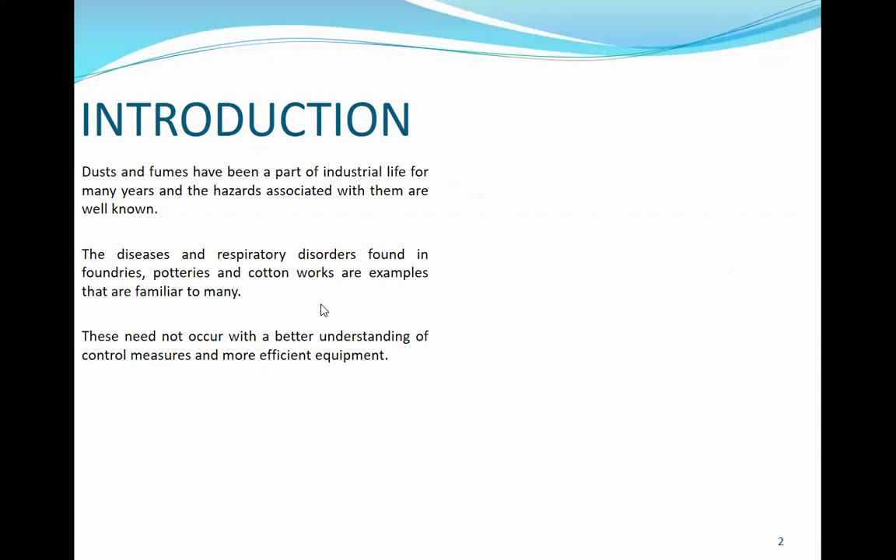Introduction. Dust and fumes have been a part of industrial life for many years, and the hazards associated with them are well known. The disease and respiratory disorders found in foundries, potteries, and cotton works are examples familiar to many. This need not occur with a better understanding of control measures and more efficient equipment. So the DNR requires air pollution control equipment.

So what is the nature of dust and fumes? Dust can be said to be a solid broken down into powder, and the form it takes will have different effects on the body. Fibrous dust can attack tissue directly, while others may be composed of poisons which are absorbed into the bloodstream. Fumes can be regarded as very small particles resulting from chemical reaction or condensation of vapors, which can have the same two effects. The standard unit normally used for measuring dust particles is the micron.

One thousandth of a millimeter, the micron. So the smallest particle visible to the unaided eye is between 50 to 100 microns, and the most dangerous sizes are between 0.2 and 5 microns. Particles larger than this are usually unable to penetrate the lung defenses, and the smaller ones settle out too slowly.

Some dust can be both toxic and fibrous, like asbestos, and are therefore harmful even outside this parameter. So it may be assumed that dust which is visible, between 50 and 100 microns, is quite safe. However, this is not the case, as a dust cloud never consists solely of particles of one size mix. Analysis would show percentages of all sizes, and for this reason special care is needed in measuring dust cloud and concentration. The next most important factor to consider when assessing a dust cloud is the actual amount of dust present.

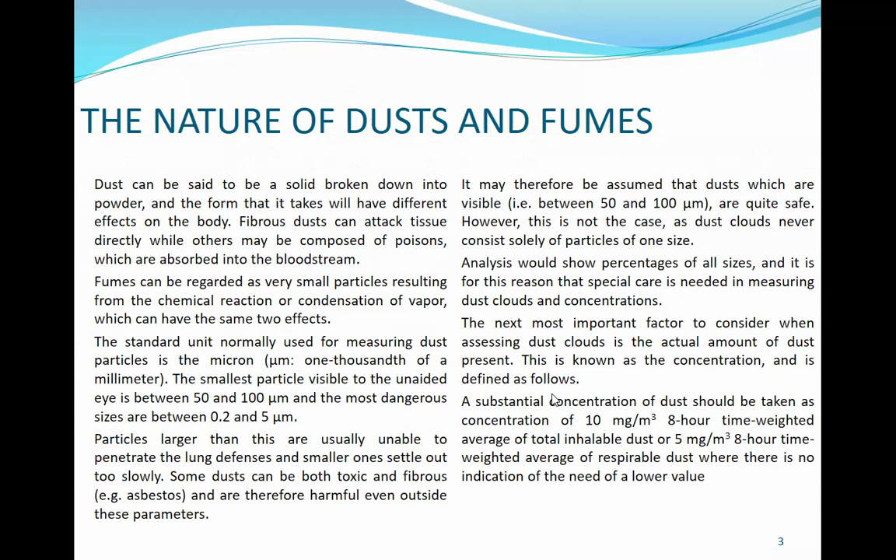Control of dust and fumes. The purpose of the control plant is to maintain a working environment that is acceptable in terms of any statutory regulations and the custom and practice within the industry. The effectiveness of a control system is measured by the amount of dust or fumes it controls. Efficiency, on the other hand, is measured by the amount of power it takes to do the work.

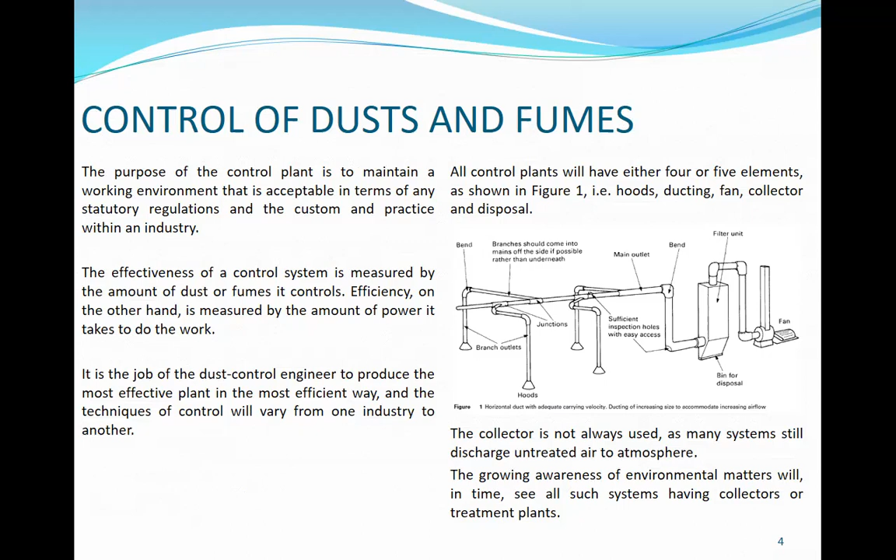Hoods that totally enclose the process provide maximum effectiveness, however, prevent the operator from carrying out the process for which the control was needed in the first place.

There are 4 rules for the design of effective hoods, irrespective of the process. Rule 1: the hood should be as close to the source of generation as possible. It should be close so that if dust is generated, it gets drawn in, not floating far away.

Rule 2: the location and shape of the hood is such that the contaminant is thrown into the hood, for capturing. Rule 3: the air flowing past the source and into the hood has a velocity at the origin greater than the velocity of escape of the contaminant, so that it can be captured faster.

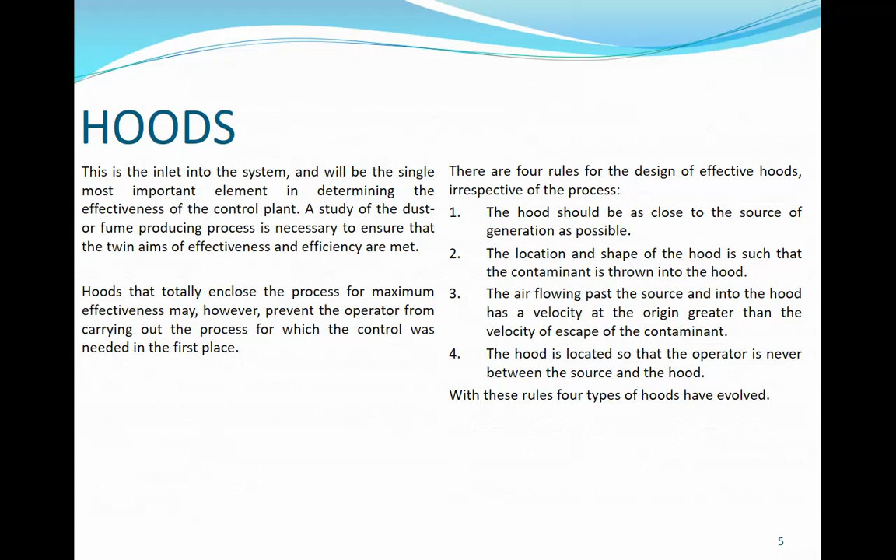Also suction. Rule 4: the hood is located so that the operator is never between the source and the hood. So with these rules, 4 types of hood have evolved: the total enclosure.

This ensures that the process is totally enclosed, which prevents any leakage to the workplace. It is rarely used except for dangerous materials such as radioactive particles in the nuclear industry or biological particles in the drug industry. This technique is used on bucket elevators, conveyors, and holding bins.

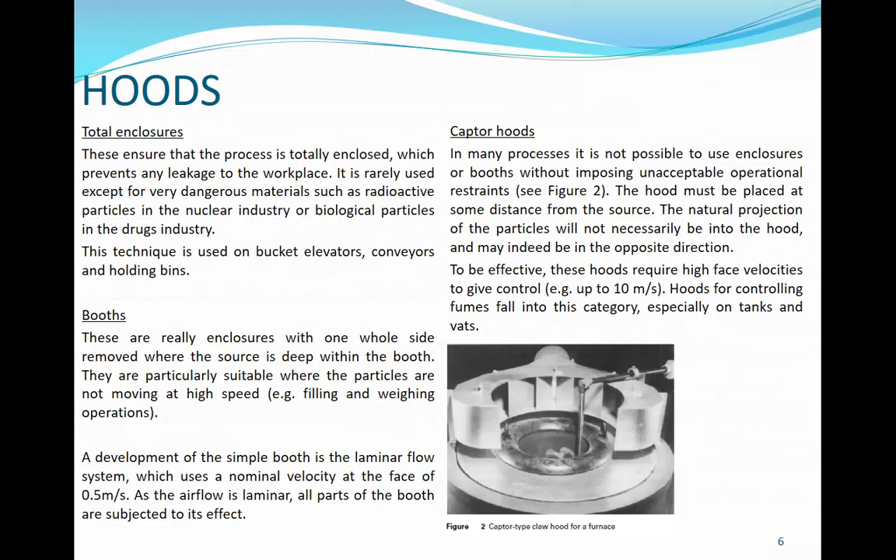Receptor hoods, these are the ones you commonly see. These derive their name from the method of entrainment.

The hood is placed in the path of the particle and uses the momentum of the particle to assist in control. It is important to have a clear understanding of the process, the direction particles take, and the movement of air created by the process.

Grinding wheels release dust over the top of the wheel, and considerable air movement is generated by the process. Therefore, these are ideally suited to control by receptor hood, figure 3.

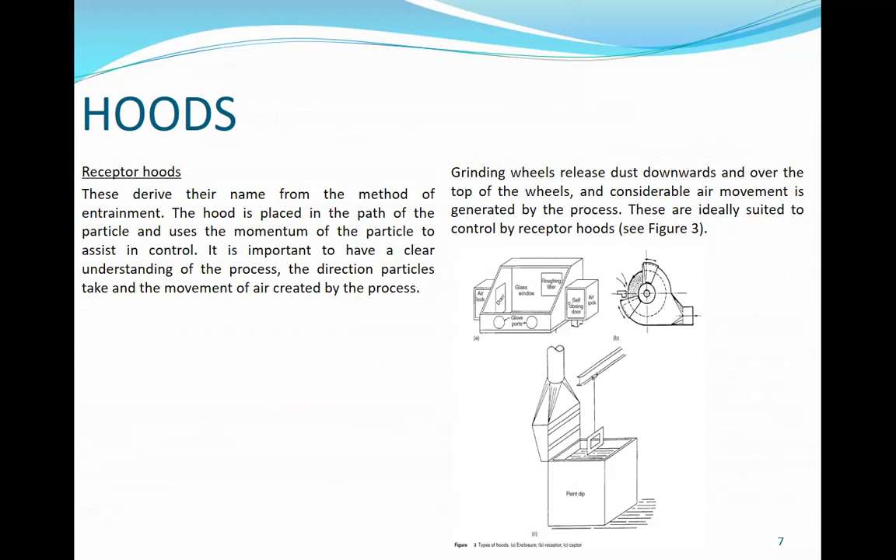So, ducting. What is ducting? The gauge of the duct, or the thickness, should be taken into account based on the nature of the particles and the operating pressure of the system.

Number 2, the method of construction usually encountered: lock-formed, welded, and slip joint and flanges. You'll encounter this in air conditioning, conditioning, and ducting.

Number 3, the construction material should be selected to withstand the operating conditions and any conditions of the pollutant. Galvanized sheet, steel, and black mild steel are the most common for general work. Corrosion or heat application will have ducting constructed in stainless steel or plastic.

For standard gauges in millimeters for this work, here they are: general dust work, 0 to 450 mm width, with a thickness of 1.0 mm. This is for general duty work.

So, all ducts over 450 mm should be flanged. This means all ducts at 450 mm should be flanged. This is also for foundry work.

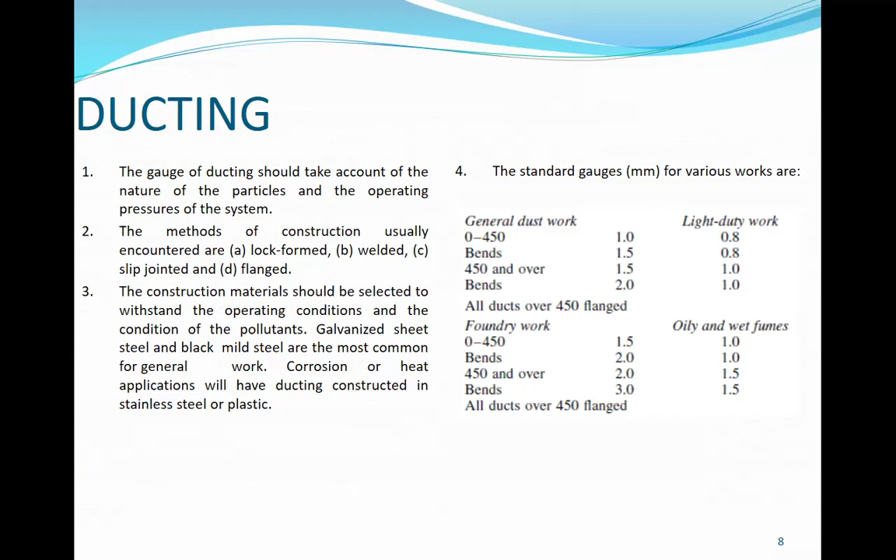And then for other work, here it is. Foundry work, oily and wet fumes, that's the data for it.

Number 5, the design of ductwork must ensure that the plant is both effective and efficient. Sharp bends and abrupt entries of branches into the main cause unnecessary pressure loss. Incorrectly sized ducts result in high pressure losses or blockages due to fallout from velocities being too low.

Number 6, the ducting should be adequately supported and fitted with inspection doors or ports. Number 7, a determination point in any system is the discharge, and many designs are used.

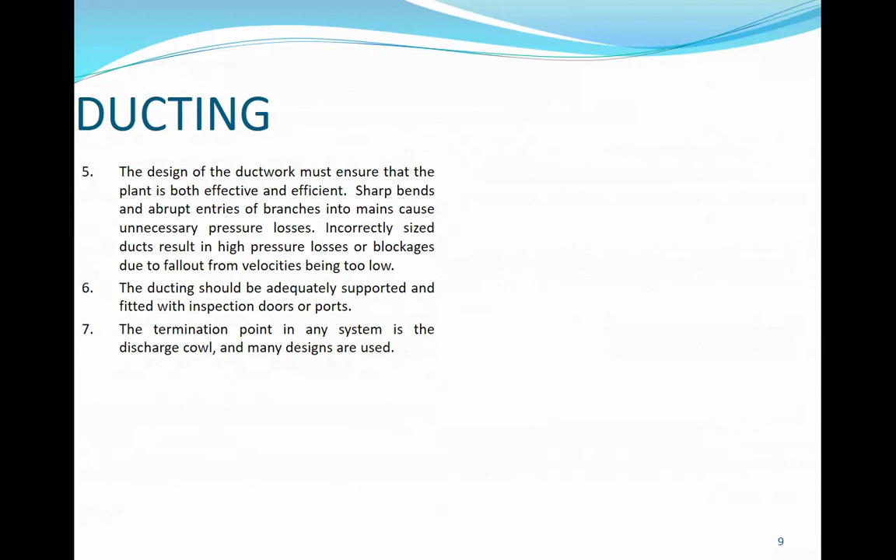Fans and louvres. Fan is a basic term.

So, in selecting fans, wait now. Fan engineering...

Fan engineering is a basic technology with its origin in ancient times. Fans have existed for a long time. It was developed from the wheel and pump as the need grew for continuous quantities of moving air at low pressure. Without the fan, a system will not function, and it is therefore necessary to select the fan to ensure both effective and efficient running of the plant.

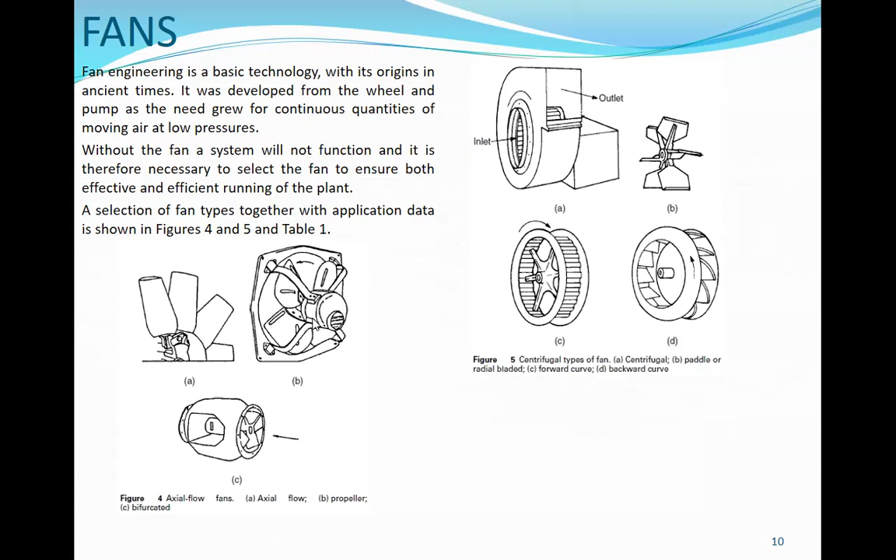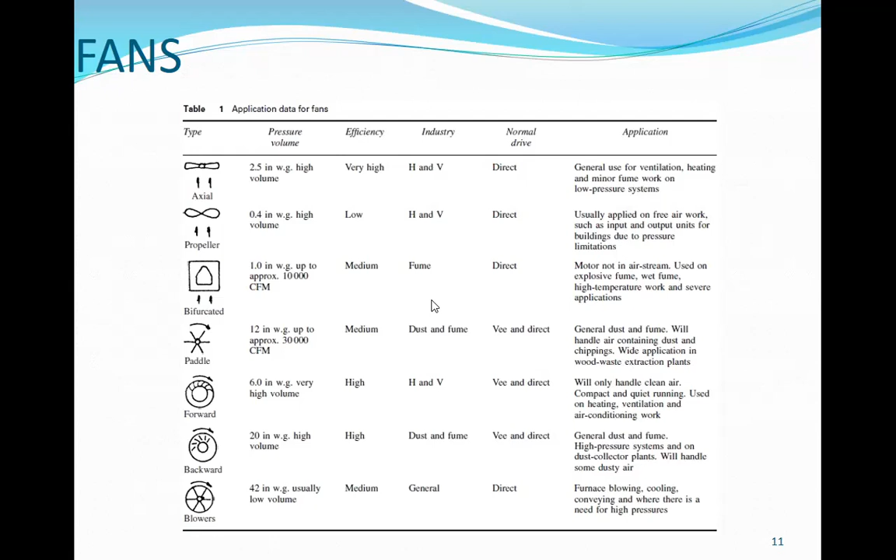So, fan performance and loads. In selecting a fan for a system, the two most important characteristics to consider are the volume and pressure. This can be said to be the movement of air in cubic meter per hour against the system resistance, which is the millimeter of water. And there are other units for this.

As the majority of systems operate at normal temperature and altitude, density is usually ignored. If the system is to work at temperatures and altitudes other than 25°C and sea level, then density must be considered in the selection.

So we have a discussion here that you need to remember. This is in the PowerPoint for your group. When the speed is changed, it is more prudent to check the performance from the following fan laws.

So fan speed varies, with size and density constant. Here's the consideration: Number 1, volume flow rate varies directly as fan speed, so volume 1 divided by volume 2 is equal to speed 1 over speed 2.

Number 2, pressure varies as the square of the fan speed, so pressure 2 over pressure 1 is equal to speed 2 squared over speed 1 squared. Number 3, power varies as the cube of fan speed, so power 2 over power 1 is equal to speed 2 cubed over speed 1 cubed. This is for fan speed varying with size and density constant.

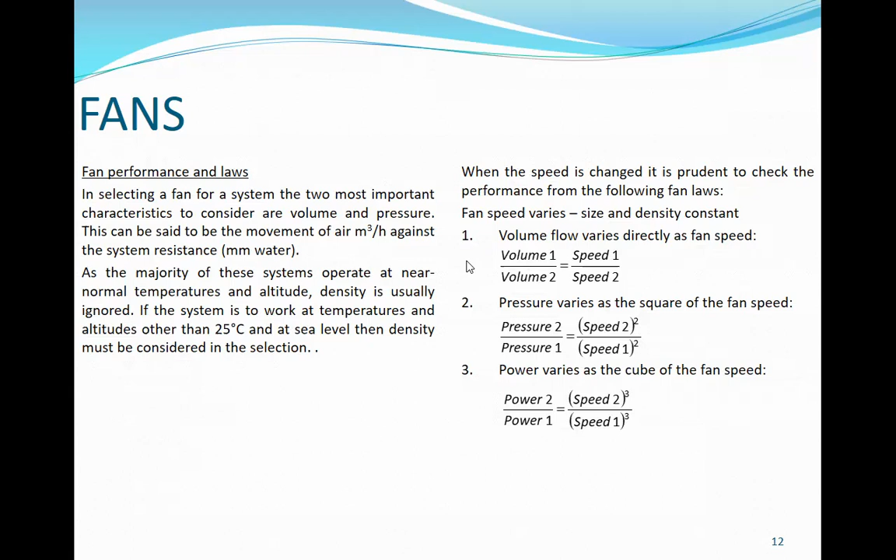A typical example will illustrate this use. A 600 mm diameter paddle bladed centrifugal fan delivers 5,100 cubic meters per hour against a resistance of 200 mm water gauge and absorbs 5.16 kilowatts when running at 1665 revolutions per minute. The motor for driving the fan is 7.5 kilowatts at 2-pole speed through a V-belt and pulleys.

What would be the new speed, pressure, and power required for the volume to be increased to 7,000 cubic meters per hour? So given is 5,100 cubic meters per hour, 200 mm water gauge, 5.16 kilowatts, 1665 RPM, and the new volume of 7,000 cubic meters per hour. Required: the new speed and power.

Solution: using the ratio formula, 7,000 over 5,100 is equal to new speed divided by 1665. So new speed is equal to 7,000 times 1665 over 5,100, which is 2285.29.

Then new pressure over 200 is equal to 2285.29 squared over 1665 squared. So new pressure is 376.77 mm water gauge. And the new power divided by 5.16 is equal to 2285.29 cubed over 1665 cubed. The new power required is 13.32 kilowatts.

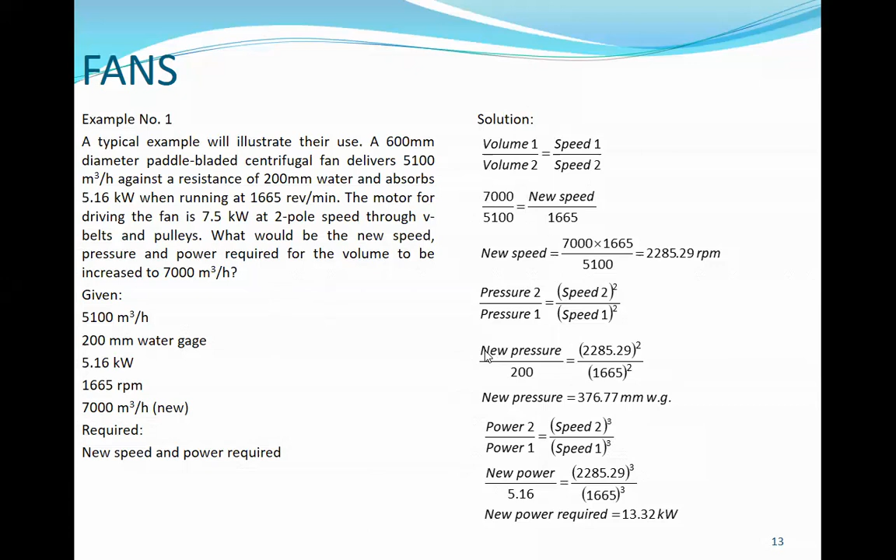Next is the collectors. The function of the collector is to separate the entrained dust or fume - from the air stream and deposit it in a convenient form for ultimate disposal. The four most common types of collectors are cyclones, fabric filters, wet collectors, and electrostatic filters. Each of the above types has been developed to meet the needs of industry, and a brief description here will enable the engineer to make a start in the selection for a particular application.

First one is the cyclones. There are two basic designs in use. The first is the general purpose large diameter cyclone, traditionally used in metal polishing and wood-waste extraction. Large diameter. The second is the so-called high efficiency small diameter cyclone used in groups for pre-separation or metal grinding exhaust.

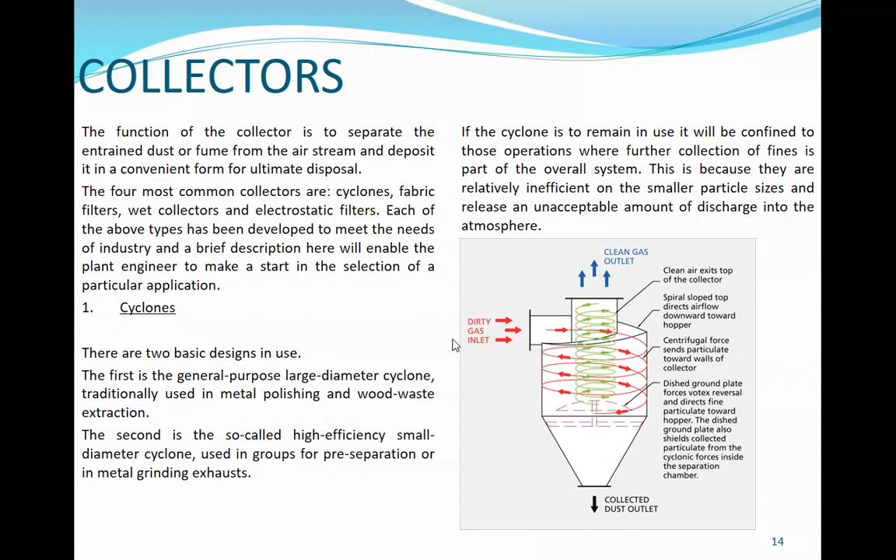If the cyclone is to remain in use, it will be confined to those operations where collection of fines is part of the overall system. This is because they are relatively inefficient on the smaller particle sizes and release an unacceptable amount of discharge into the atmosphere. So these are the parts of the mass collector. Dirty gas enters here, and exits here.

Number two, wet collectors. There are two types: the self-induced spray and the pressure spray. We don't have a figure for this here. Many designs have been developed to suit specific dust or fume problems, and it is now possible to use wet collectors for the treatment of solids and fumes down to very small particle sizes.

Type 1, self-induced spray wet collectors. This is the most common type and relies on its separating action from the induced air from the fan, pulling the contaminated air through a curtain of water. It is simple in operation with no pumps or moving parts except for the fan, which is set on the clean side of the collector.

Next type is the spray type collectors. In this system, water is sprayed or cascaded onto the contaminated air directly or through packed towers, and the fumes or dust are washed away by absorption - like a cooling tower. Number 3, fabric filter.

The ideal filter is permeable to the air stream, but not to the dust requiring separation. Separation occurs by impacting of the dust particle upon fabric fibers, resulting in a dust cake forming on the fabric. Two methods are used to remove the dust cake, both of which require interruption of airflow.

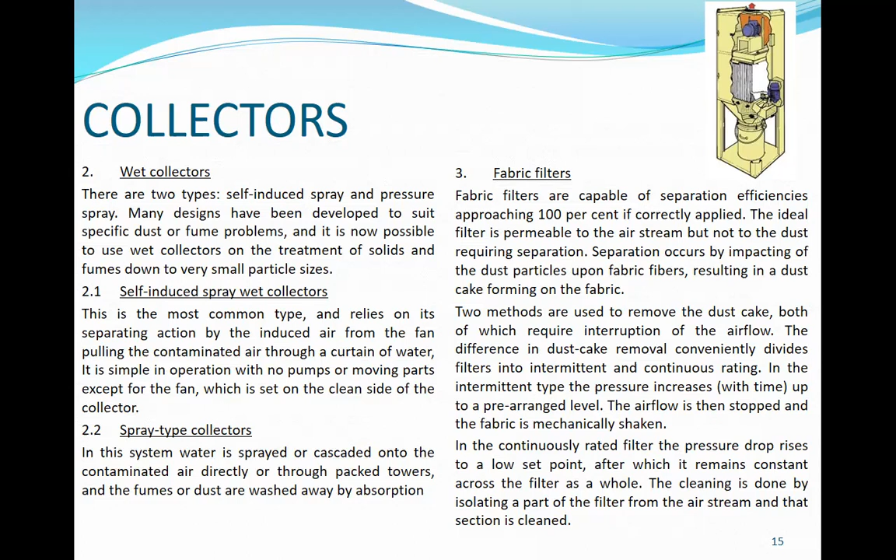Intermittent filters are best suited to small applications which allow the process to be stopped at intervals. The interval used is 4 hours, morning or afternoon shift. Mechanical shaking is done by either hand or electric motor.

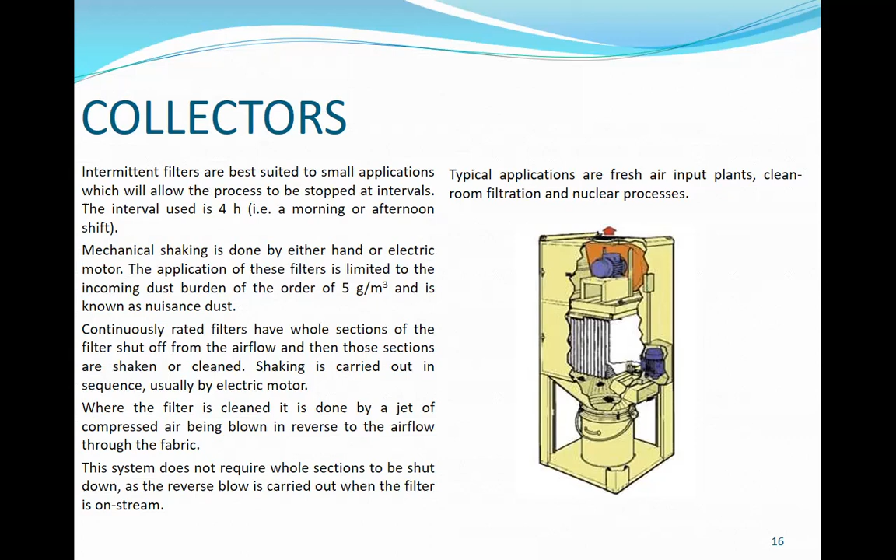Last is the electrostatic precipitator. These remove particles by means of applied electrical forces and are used extensively on cement and fly ash removal from air streams. The particles are first given an electric charge, then passed through an electric field to apply a precipitation force on them.

They are then captured on collecting surfaces, normally an electrode. The collection surface is then cleaned by rapping or water wash, and dust is collected in a hopper below.

The efficiencies achieved are high for particle sizes above 1 micron. They are cheap to run, but the capital costs are high, especially for large collectors. In recent years, small units have been developed to control oil and welding fumes.

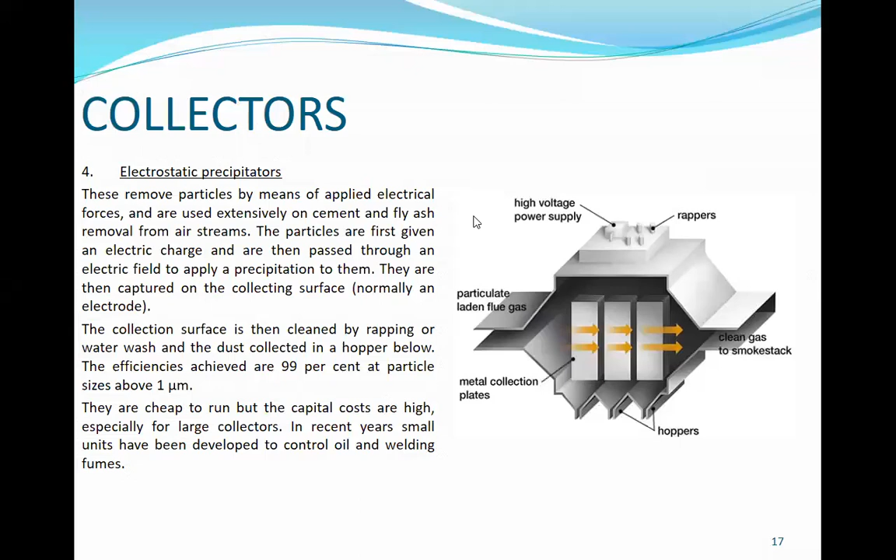For disposal, many control plants fail in their objective when the collected waste is removed from the inlet. The practice of dropping dust into a sealed bin at the base of the collector is both sensible and practical.

It is when the bins are to be emptied that a secondary dust problem arises. If the waste is simply put into a large container with no control, dust will be released back into the workplace.

If dangerous dust is being collected, a sealed inner liner to the dustbin can be used, thereby preventing the release and protecting further. On larger installations, the collected dust is retained under sealed conditions at all times, and the

discharge from the collector is by rotary valve and conveyor. This will feed into bulk containers for further processing.

In case of fumes, these are collected by absorption into liquors, and these liquors are treated in an effluent plant separate from the fume plant.

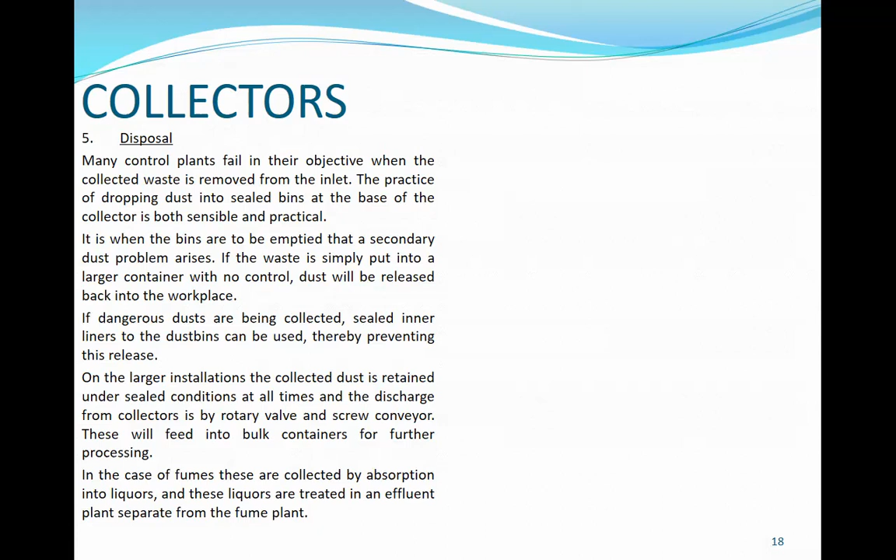System design and application. In selecting the best system to control the hazard, the following should be noted: 1. The problem must be surveyed under actual working conditions and data collected and recorded in a logical manner.

The survey must establish: A. The origin of the dust or fume and its nature. Is it toxic, explosive, or hazardous in any way?

B. The process which produces the contaminant. Is it wet or dry? C. Whether the problem can be solved by elimination of the process.

D. Source or sources of the problem. Does it occur at more than one point? E. Do any special regulations apply to the hazard, and is the material being handled listed in any published form as having control limits?

F. Is a control system in use at the time of the survey? Having completed the survey, the next stage is to draw the system showing the sources of dust and the duct runs.

This is mechanical drawing. An assessment must then be made on the air volumes and velocities required for control. This is largely a matter of experience.

As air entrainment rates are derived empirically, it is possible to calculate the rates, but this is unusual in general engineering. There are published lists for air rates, and many companies have their own standard air rates.

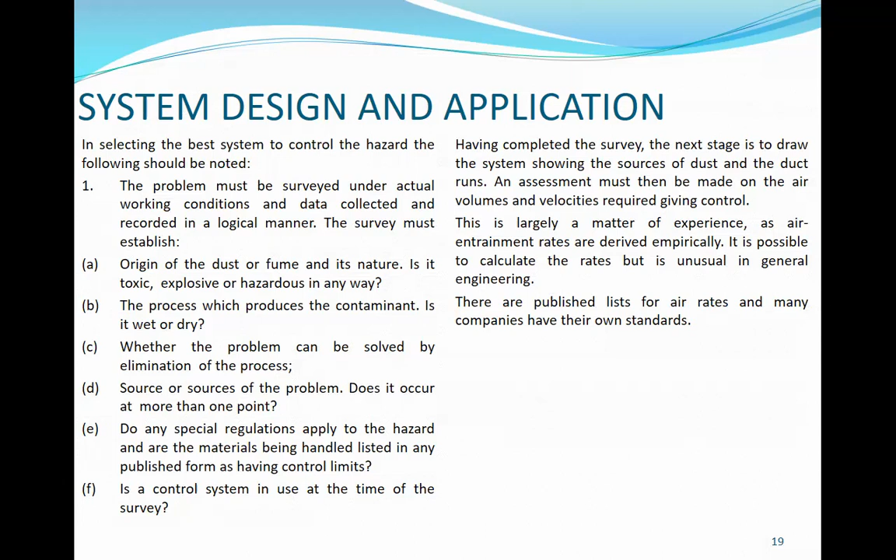So, CFM and airflow rate for dust collected. Here's an example: Table 2 shows rates for metal working machines.

When the total air volume has been established, the collector and fan can be sized. The total air volume and the type of dust will determine the size and type of collector to be used. Table 3 shows the type of collector for various applications.

For this application in Table 3, the type would be self-induced collectors, etc. And for another application, cyclones for woodworking and initial separation.

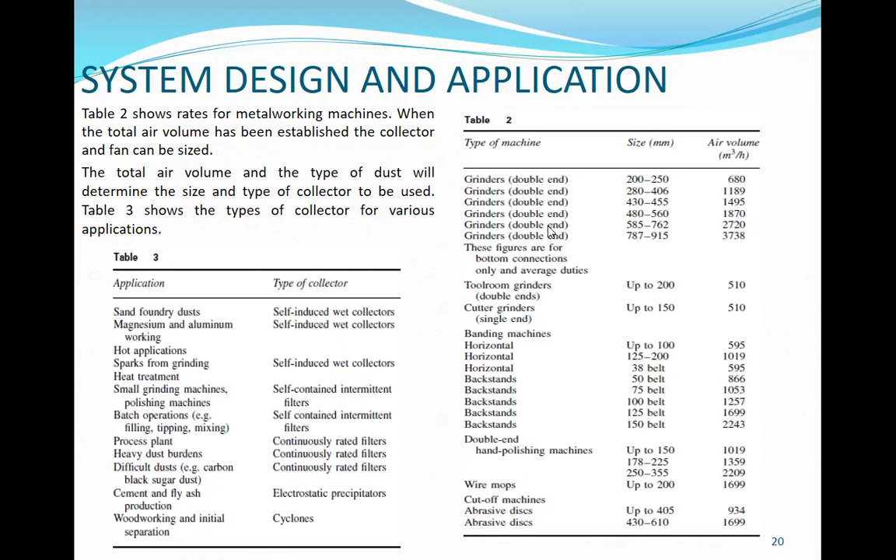To size the fan, it is necessary to know the total air volume and the pressure in the system. These are calculated from the losses in the system on the longest or index leg, beginning with the hood.

The hood entry loss can be expressed as 0.6 of the velocity head and is accurate enough for a first estimate. The losses are then calculated based on the velocities in the duct. Each change of direction means a small loss equivalent to a length of duct. Added to the pressure drop loss across the collector and the outlet losses, this gives the total static pressure required in the system for the first trial.

The formula used in the calculation of system losses for the first estimate is: the loss in millimeters of water per length of duct equals velocity squared times 1.243, over the diameter of the duct.

So itong velocity head, yan yung kukonsumuhin mo. Makukuha mo yung first estimate ng pressure drop. Tapos check mo na yung duct size mo.

Velocity head or velocity pressure is the pressure required to accelerate the flowing mass from rest to its flowing velocity. The velocity pressure in water is velocity in meters per second squared, divided by 4.04 squared.

Check nyo lang kung saan galing yung 4.04. The static pressure is the pressure to overcome resistance and is expressed in millimeters of water. The total pressure is the sum of velocity and static pressure.

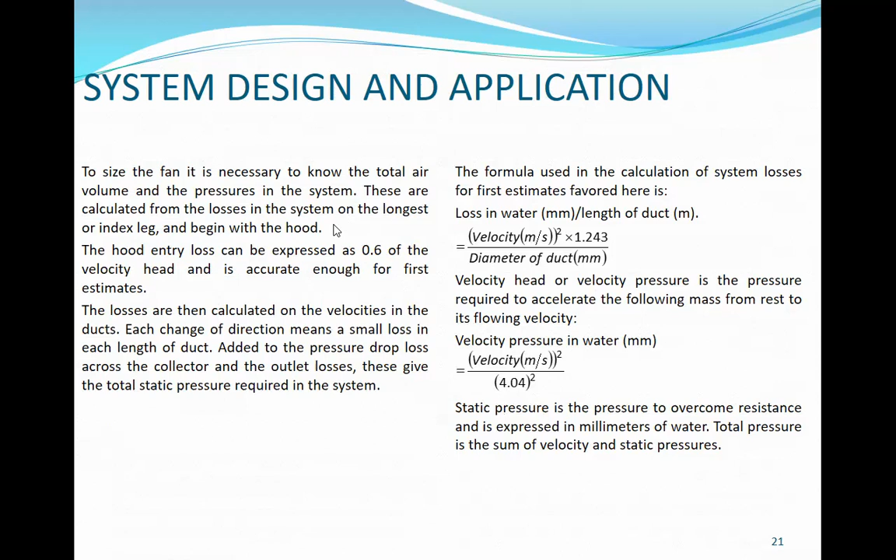Minsan sa selection mo, yung pressure sa catalog nakalagay is total static pressure, so static pressure ka lang. Pag total pressure naman ang nakalagay, kasama na yung velocity.

System design and application. The basic formula for air flow under all conditions is Q equals A times V, where Q is volume in cubic meters per second, A is area, and V is velocity.

The nominal velocities used in dust and fume control depend on the material being handled, but the following will suffice for most work. This is recommended.

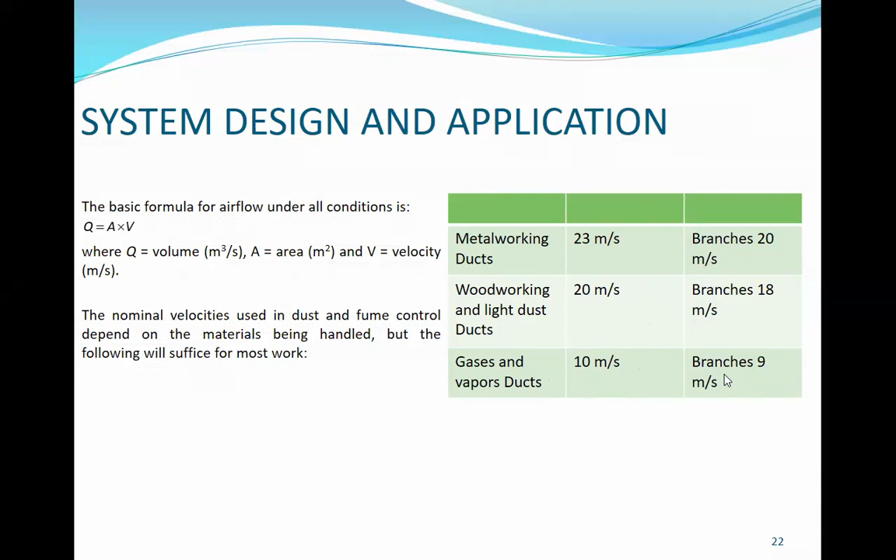So ito, metal working duct is 23 meters per second, and branches also 20 meters per second. Yung sa woodworking and light dust naman, 20 meters per second yung duct velocity and 18 meters per second sa branches. Gases and vapor ducts, velocity is 10 meters per second and the branches 9 meters per second. So yan yung mga rules.

So it is now possible to calculate the total system resistance and select a suitable fan and collector. The following will illustrate the use of the formula. Example number 2.

Number 1. Meron pala example number 1 muna. Given: a simple duct system, length of 15 meters, serving a double end grinding machine requires an exhaust volume of 6,000 cubic meters.

Itong length na to, equivalent length na to kasama ng mga fittings, the duct velocity, fittings na except sa hood. The duct velocity will be 23 meters per second, giving a diameter of 300 mm and a velocity pressure of 32.41 mm. Given the length is 15 meters, exhaust volume 6,000 cubic meters per hour, duct velocity 23 meters per second, diameter 300 mm, velocity pressure 32.41.

Require the total system resistance and select a suitable fan and collector. Selection: the hood loss is 0.6 times 32.41, which is 19.45 mm of water. The duct losses in 15 meters is 23 squared times 1.243 over 300, equals 109.59 mm of water. So the total pressure, velocity pressure plus static pressure, is 32.41 plus 109.59 plus 19.45, equals 161.45 mm of water.

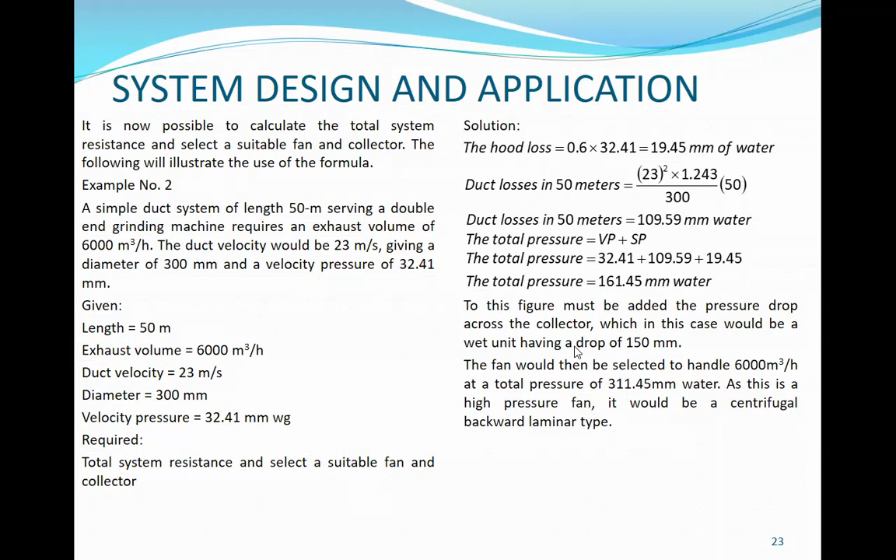Now, testing and commissioning. After lahat ng mga installation, pwede rin to. As the same, after the plant has been installed, it will require a test to determine whether the design meets the original objectives. In this assessment, the effectiveness of the plant will be established, and at the same time a record made showing the engineering parameters.

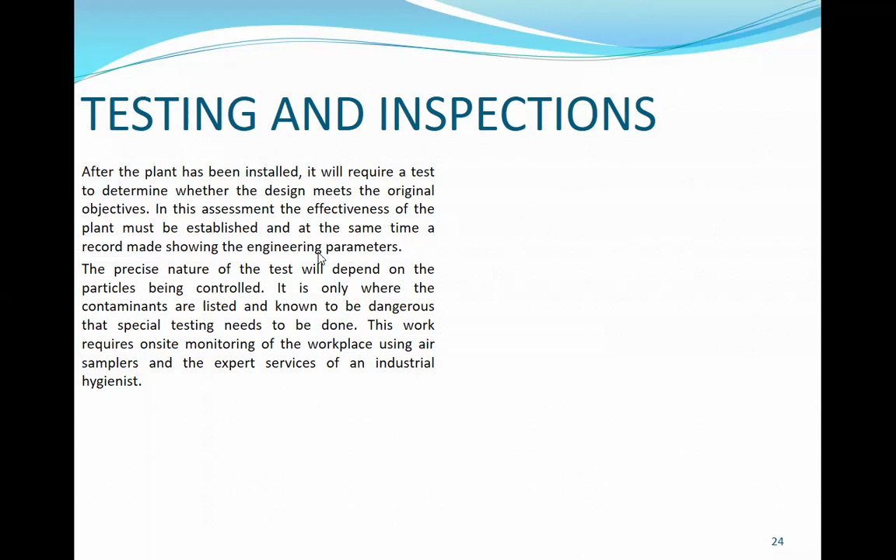The precise nature of the test will depend on the particles being controlled. It is only where the contaminants are listed and known to be dangerous that special testing needs to be done. This work requires on-site monitoring of the workplace using air samplers and the expert services of an industrial hygienist. Okay, so this is the end of the dust collection system.